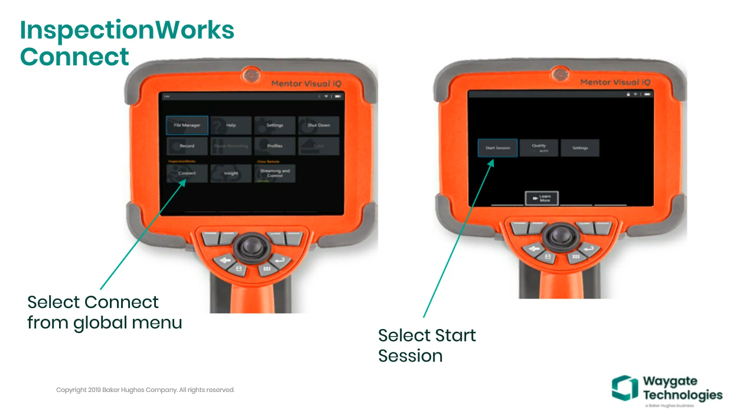Initiating an InspectionWorks Connect session from a Mentor Visual IQ is quite simple. Once the MVIQ is on a Wi-Fi network, and you would join it to a network just like you do your smartphone with a username and password, all you do is touch the on-screen Connect button, followed by touching the on-screen Start Session button. The MVIQ will now set up a communication session with the InspectionWorks Connect cloud host system, which will issue a set of session credentials for the upcoming live streaming event.

The Borescope inspector can call a remote expert on his cell phone and ask him to log into InspectionWorks.com and provide the credential information that's being shown on the video probe screen, or he can press the on-screen invite key located at the bottom of the screen on the Mentor Visual IQ, enter the email address, and the MVIQ can send an email directly to the remote expert's inbox asking him to log into a video streaming session with the session ID and password credentials included in that email.

Here's an example of what a remote expert would see on his PC screen, as well as what is being shown on the Mentor Visual IQ screen. Note that the remote expert and the inspector can have a text chat back and forth over the video streaming session.

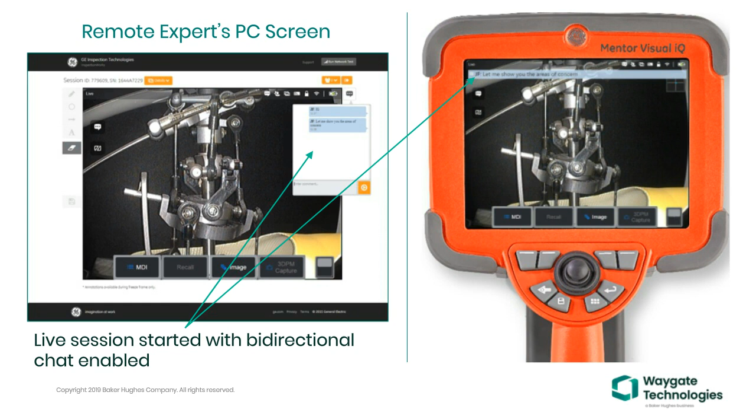When the inspector has gone into freeze frame mode on the video borescope, that is, the image is frozen, the remote expert can use the telestration tools to draw circles and arrows, as well as place on-screen text. All of this information will show up as overlay data on the screen of the video borescope in the field in the hands of the inspector.

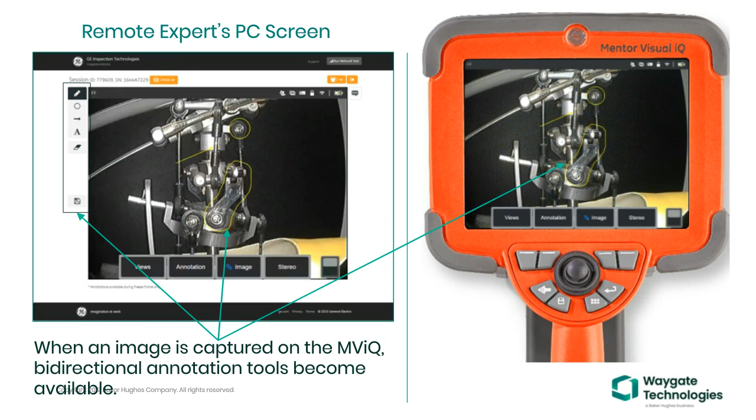I'm now going to demonstrate setting up an InspectionWorks Connect video streaming session. I do this by going to the main menu and touching Connect, and then Start Session. The Mentor now goes off and obtains a session ID and password from the InspectionWorks Connect host. I can now invite a remote expert, Tom Britton, to view this live inspection.

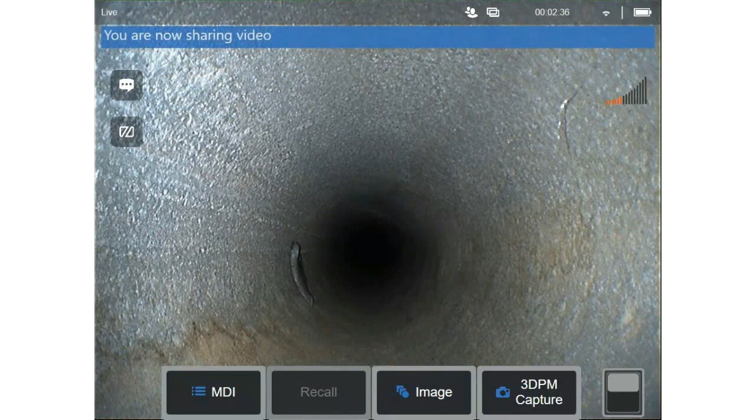I get a banner message on the top of my screen indicating it was sent. Once Tom joins the session, I get another banner message indicating that he has joined the session. And I go back to my live inspection. I'll get a confirmation message that he is actually seeing live video on his screen.

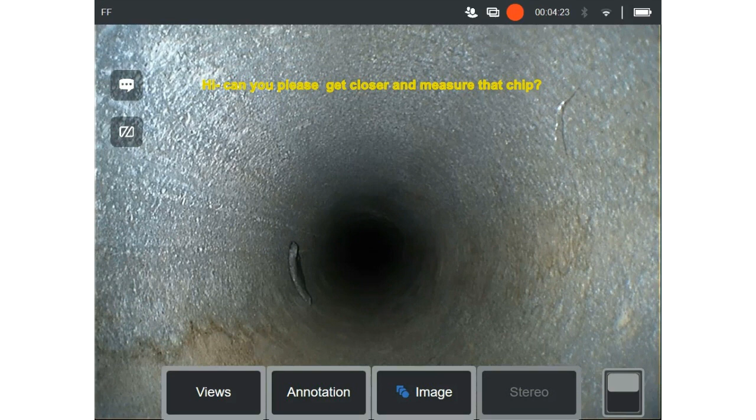I can now pause my video, send a chat message to Tom. He can respond back with a chat message to me. He's asking me to get closer and measure the chip that is visible down in the pipe. I'll move the video probe a little bit forward. I'll freeze the image again.

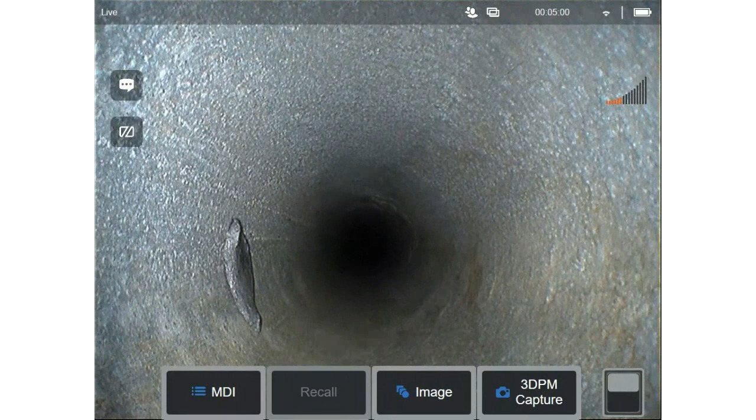Tom can continue to use his interactive telestration tools of arrows and circles and text messaging to continue an interactive inspection. I'll now discuss the iView Remote features of the Mentor Visual IQ. iView Remote is a local wireless connectivity feature of the Mentor Visual IQ that allows communication and control features with an iPhone and iPad iOS device without the need for any external adapters.

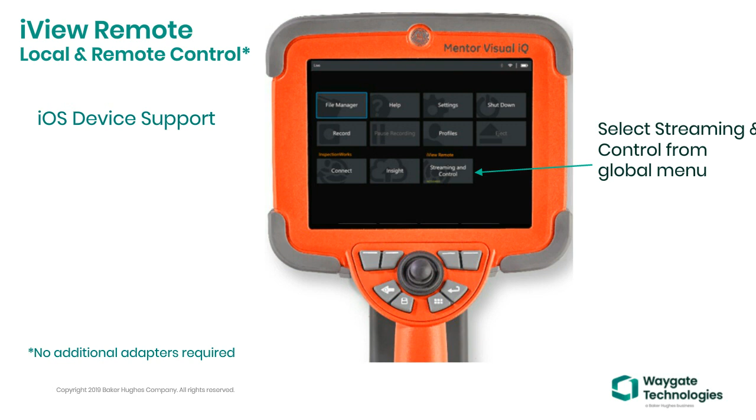The iView Remote Local Streaming feature provides a simple method of allowing a second inspector to see the borescope image without the need for cables and a large external monitor setup. The iView Remote feature allows local streaming to an iOS device, as well as data transfer back and forth between the iOS device and the video borescope, as well as full touchscreen remote control from the iPhone or the iPad's touchscreen.

All features that can be operated by the inspector with the borescope in his hand, including articulation, can be operated using the iPhone or iPad's touchscreen. The connection between the Mentor Visual IQ and the iOS device can be wired using an Apple Lightning cable, or the MVIQ can set itself up as a Wi-Fi hotspot, allowing the iPhone or iPad to communicate with the MVIQ.

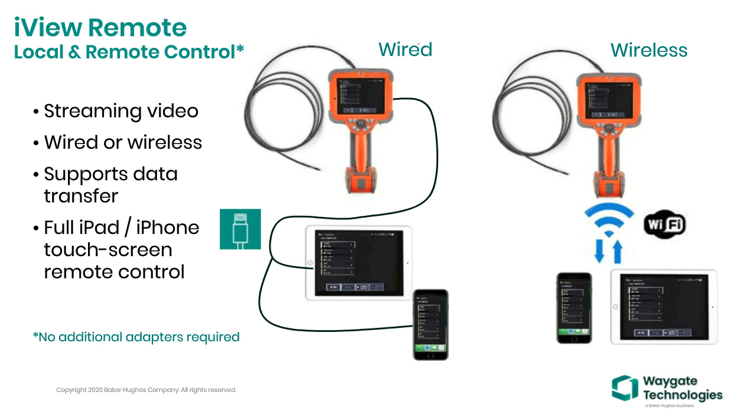I'd now like to introduce the Menu Directed Inspection, or MDI app, which may be run on a variety of Waygate Technologies video probes. This app allows for a highly efficient method of capturing inspection data, organizing that data, and if desired, creating a Microsoft Word or PDF inspection report directly from the video borescope.

At a high level, the MDI app can be thought of as a program that's loaded onto a video probe that contains a hierarchical tree structure of all the possible inspection points to be encountered during an inspection. This MDI enables consistently tagged inspection images from across a fleet of assets.

The context information is correlated at the point of image capture, thereby ensuring data integrity, so you know exactly what asset a given image was taken from and what location in the asset that particular image was located in.

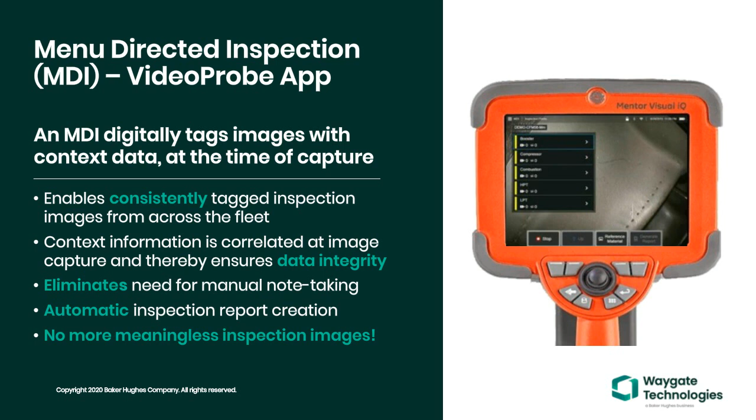It eliminates the need for manual note-taking. That means you don't have to correlate a little notepad on the side that gives a time and date stamp to a location associated with an image. It automatically creates an inspection report at the end of running the MDI. Again, no more meaningless inspection images—you know exactly the location of every image taken during an MDI inspection.

I spoke earlier about an MDI having a tree-like structure. An MDI is an inspection template created by the users of a Waygate Technologies video probe using the MDI Builder PC-based software development tool. We provide this tool and our users create the structure of their intended inspections.

So the MDI will allow you to develop an MDI inspection template that has 5 levels of inspection detail. You can generate reports with up to 1,600 total images, and there can be up to 2,500 total inspection points.

Each of the points associated with an image capture will have a set of XML database tags associated with that image. So if you are looking, for instance, at a CFM56 engine, and say you were in the high-pressure compressor, stage 2, looking at blade 31, the leading edge—all that information would be captured as metadata associated with that image, along with higher-level engine data such as the engine type, serial number, date, inspector's name, time of inspection, and any fault conditions such as burns, cracks, missing thermal barrier coating, or other comments associated with the inspection.

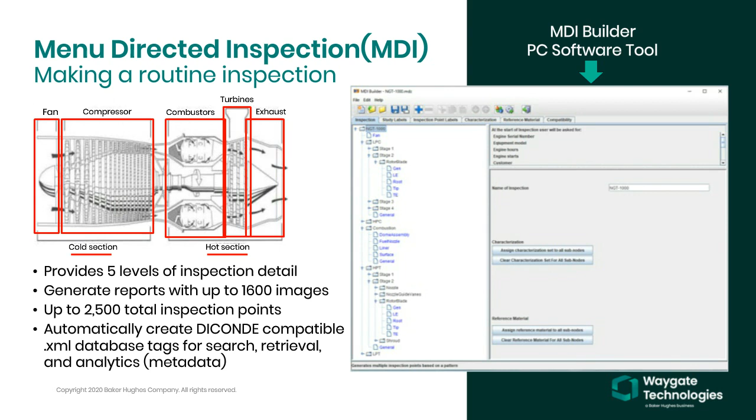Let's take a quick look at the data created during a traditional non-MDI inspection. This is what you would see: you may have some videos captured, with a time and date stamp, and images captured, also with a time and date stamp. There won't be any automatically generated report associated with that. So you'd have to have a little notepad on the side correlating any given time and date stamped image or video to the actual location in the asset where it was captured.

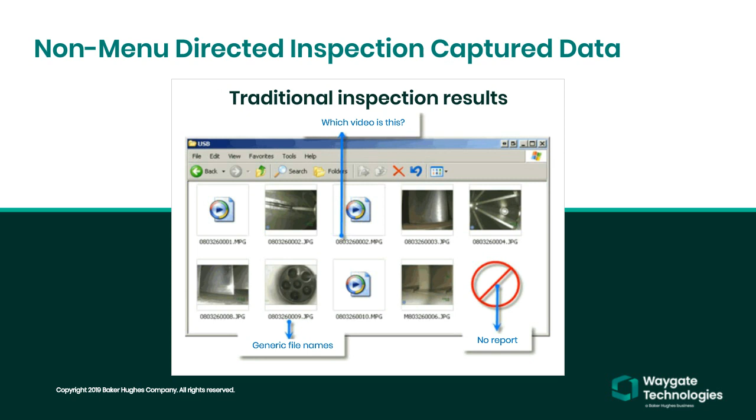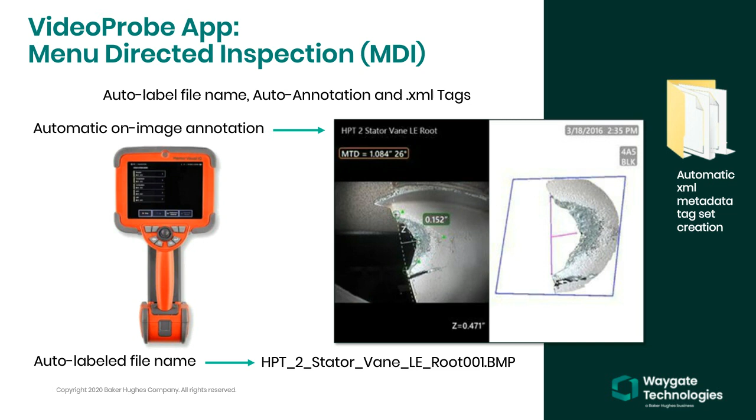It color codes these with green, yellow, and red. When the report is generated, you can select to create a report with all images or just flagged images.

Now I'm going to provide an overview of building an MDI and describe the types of features that are available in the MDI.

The MDI Builder tool has a series of tabs that allow you to enter specific MDI inspection details for your inspection. The first tab is where you build your tree structure, up to 5 levels. For any given MDI branch or end node, you can define a set of fault characteristics that the inspector will have available in a drop-down menu. Also, you can include reference images or documents in the MDI so that they are available for the inspector for reference at a given branch or end node inspection point.

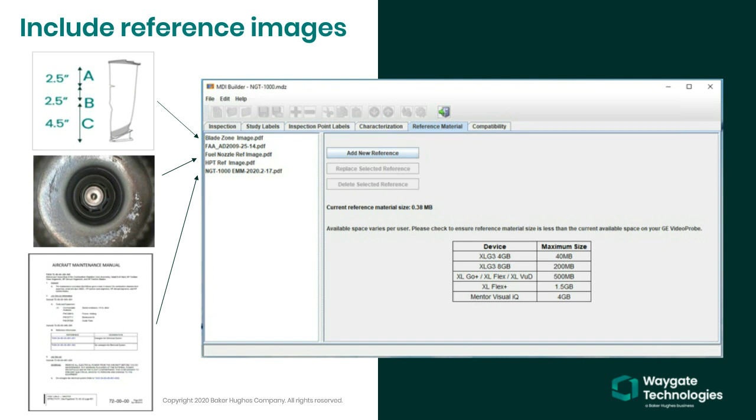Now I'll review the process of loading an MDI onto a Mentor Visual IQ video borescope.

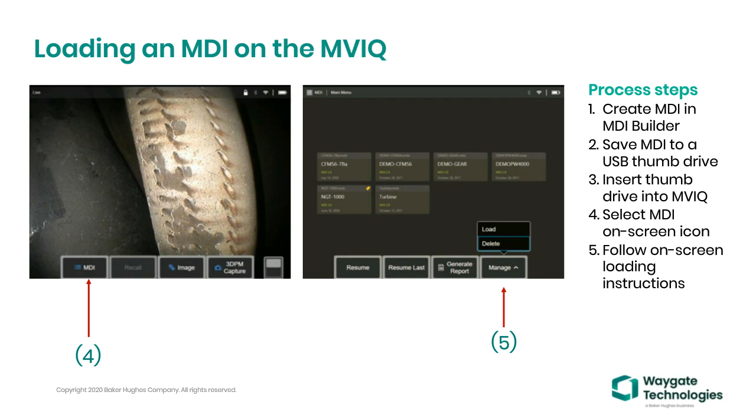I will now go through a summary of the process of running an MDI on a Mentor Visual IQ. This will be followed by a short video of an actual MDI inspection.

Once you've selected an MDI from the thumbnail list of installed MDIs, you'll be taken to the cover page data entry screen. This is where you enter all the data that you previously defined as being required or optional back in the MDI Builder. Once you have entered all of the required data, you will then transition to the top-level MDI inspection tree. Since the Mentor Visual IQ is a touchscreen-based product, you can navigate down the branches of the MDI to arrive at an end inspection point through a series of touches on the inspection tree itself.

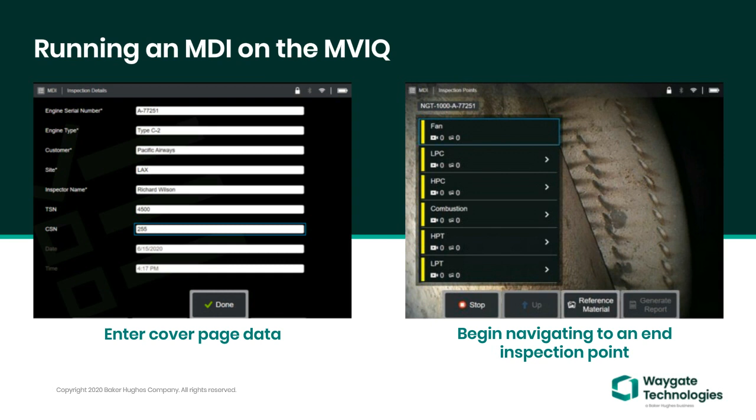Or you can add an audio clip, which will be saved as an MP3 file with the same root file name as the MDI image that's being saved here.

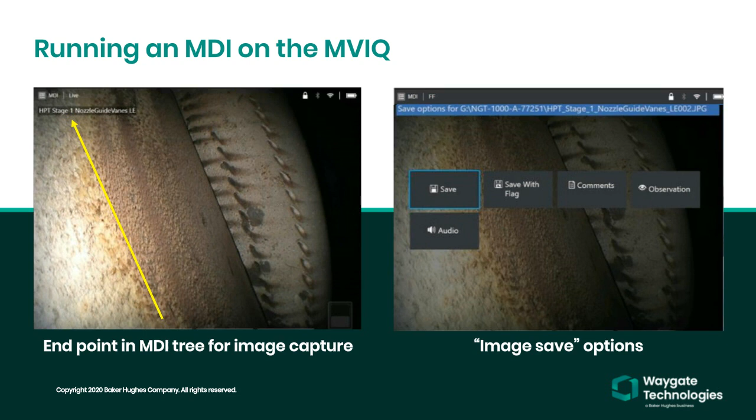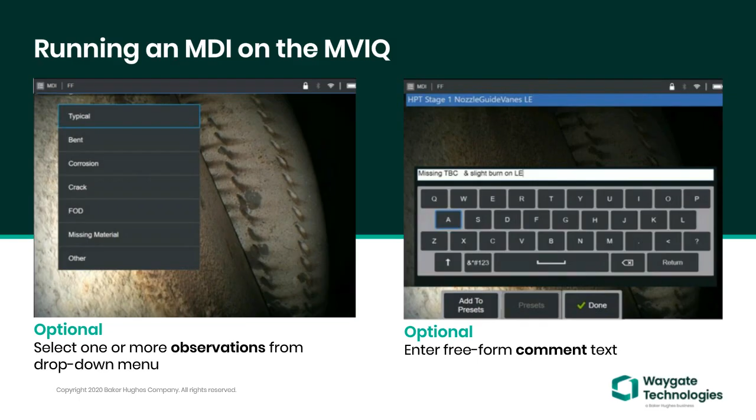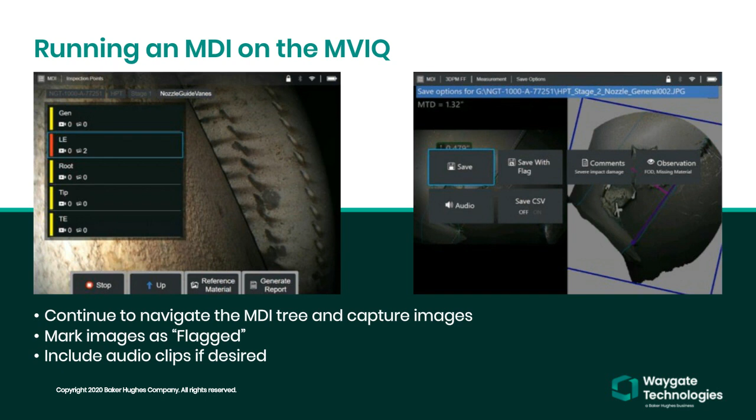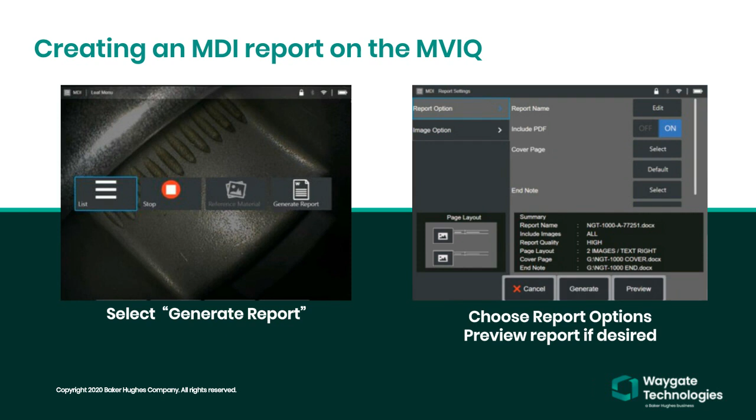Remember that an MDI does not need to be a full front-to-back inspection template. It actually could be designed to define a critical inspection point or two associated with some type of a service bulletin. The MDI potentially could contain reference images showing the orientation characteristics of the view of a component at an inspection point for which the author of the MDI would like to have captured.

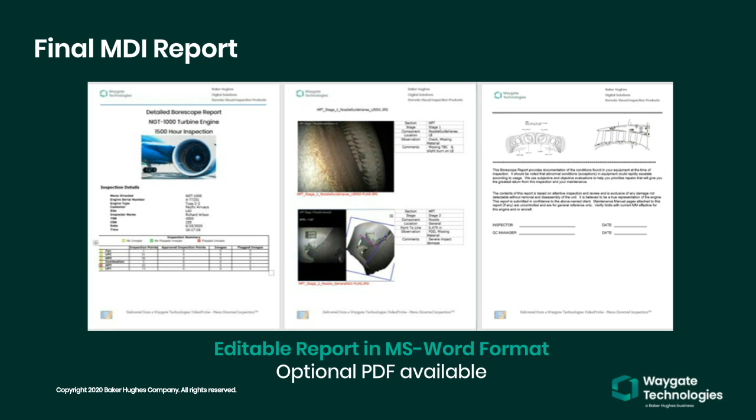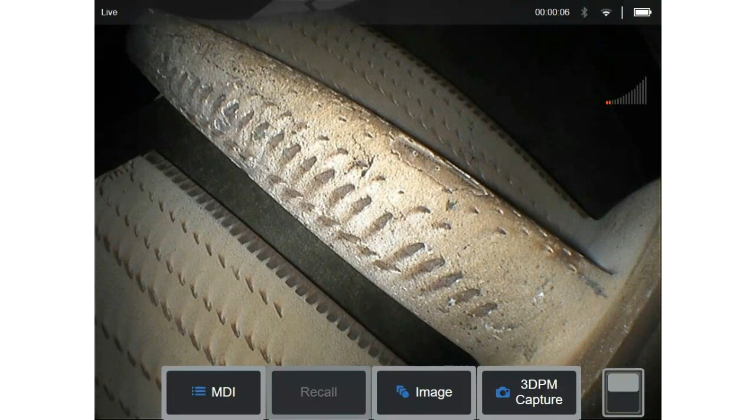I'm now going to demonstrate how to select and run an MDI on a Mentor Visual IQ. You begin by touching the MDI button. You will then be presented with a screen of available MDIs to choose from. I'll choose the NGT 1000. As soon as I make my selection, I'm presented with the cover page data entry sheet for the MDI. Note that some of this data must be entered before I can proceed with the MDI, and some is not required. Required information contains an asterisk.

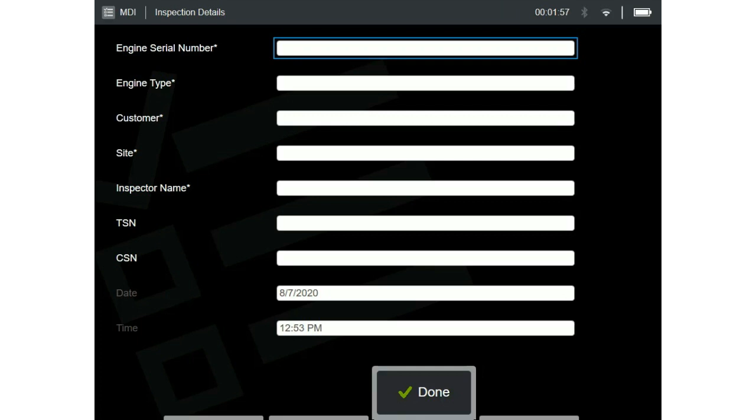I begin entering the requested data by touching the box, which brings up the on-screen keyboard. I type in the information and press Done. I do this for all the required fields. When I've completed all the required entry, I press Done. I'll now be presented with a screen which allows me to choose where I'm storing this MDI. In this case, it's being stored on my G drive.

Once I make that selection, I'm presented with the top-level MDI inspection tree. I can now begin my MDI inspection by touching one of the available main branches on the MDI screen. In this case, I'm going to choose the HPT. I'm going to choose Stage 1, and I'm going to choose Nozzle Guide Vanes. And I'm going to choose the leading edge.

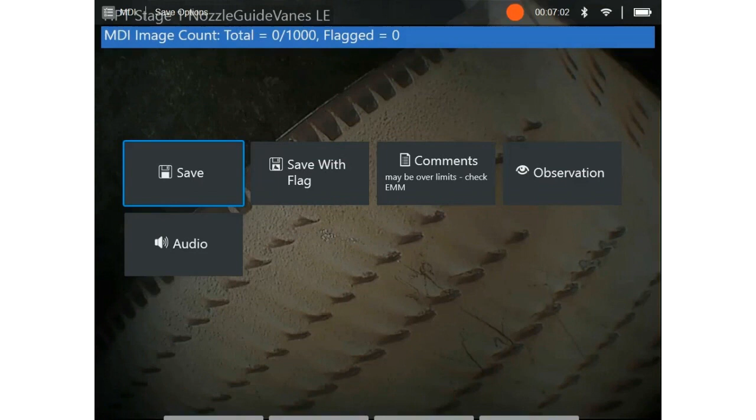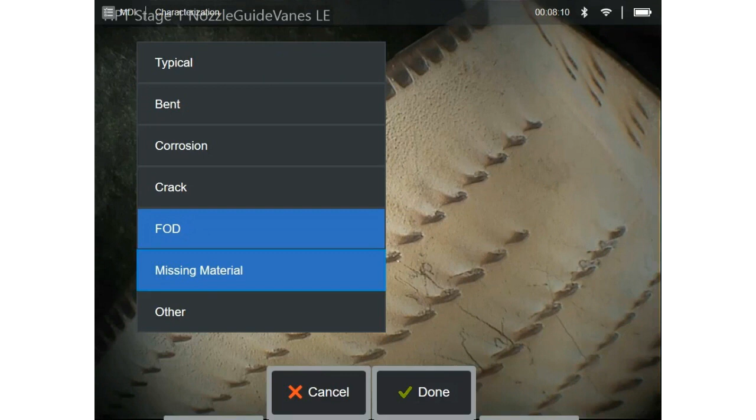Once I freeze the image, I'm given the option of saving it with a flag, adding comments, adding an observation, or including an audio clip. So before I save, I'm going to add some comments. I can add free-form text entry by touching the comment box. I can select from a drop-down list of observations by touching the observation box. I can select multiple characterizations, including an other category. Now that I've added my comments and observations, I'm going to save this image.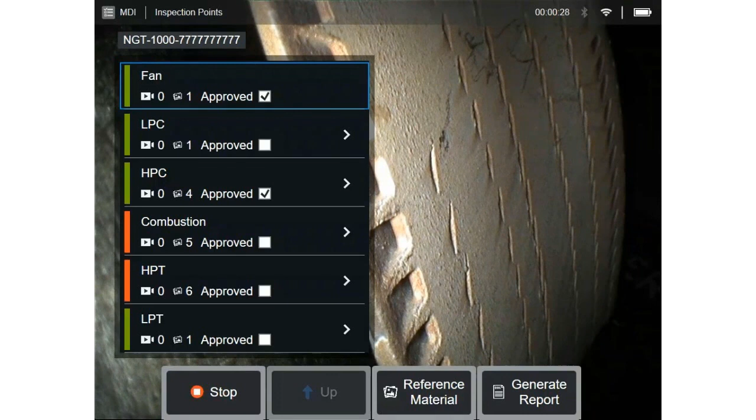Note that my comments and observations are shown directly in the command buttons on the screen. You can see the smart file name associated with this image in the header banner at the top of the screen. At any time during running the MDI, I can stop the MDI and resume it later on, or I can choose to generate a report. In order to generate a report, I press the on-screen Generate a Report key. The system will now show me a screen containing the output reporting format options.

I've already pre-selected to include a PDF as part of the output report. Now I'm going to select a custom cover page and a custom end page. When I touch Select, I can browse for these custom pages. They're located on my thumb drive. Once I have completed setting up the output report format, I can get a preview of this report by touching the Preview button.

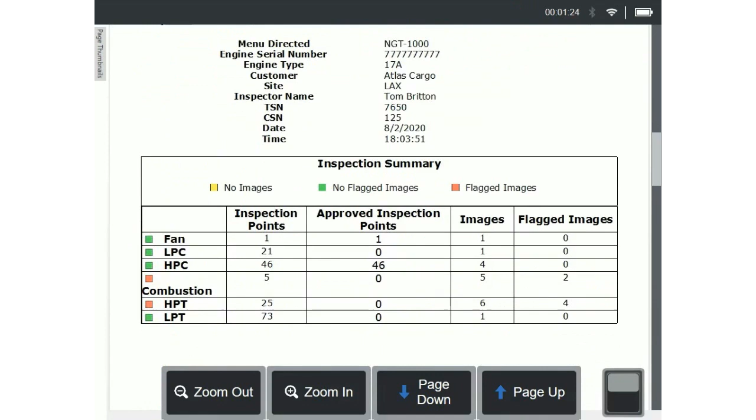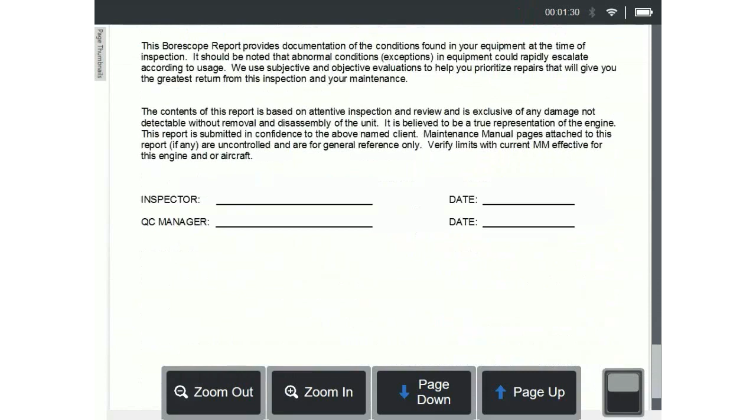I can review the cover page data which is entered at the beginning of the MDI, as well as the summary table that lists how many images were taken in each of the major branches and whether any of them were flagged. If I'm satisfied with the preview, I can touch the Generate button and create a full report. You can now exit the MDI and return to live video.

In the next few slides, I will discuss the various connectivity options available to support the import and export of data to and from the Mentor Visual IQ video borescope. As was previously mentioned when discussing live video streaming, the MVIQ contains a built-in Wi-Fi radio to allow it to send and receive data over a wired or wireless network connection. The MVIQ supports the features of being able to map a storage location on a network as a destination to store borescope data, or to allow another device on that network to share a folder in the MVIQ's memory structure. The MVIQ also supports a configuration where it appears as a mass storage device when attached to a PC, similar to the way you would attach an external USB hard drive to a PC.

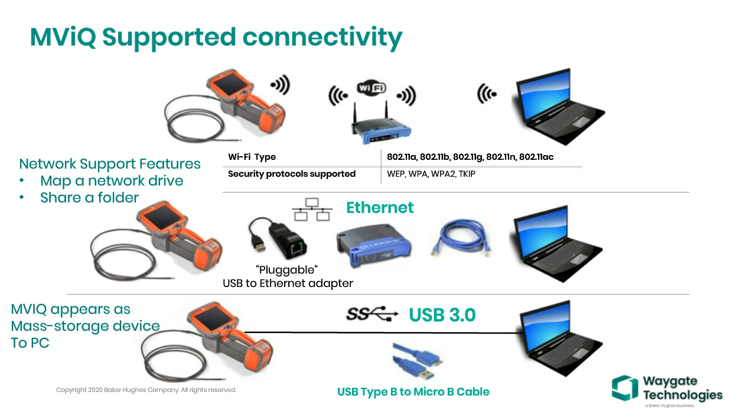The Mentor Visual IQ contains USB 3.0 interface ports, which allows it to support the attachment of external removable media devices, including encrypted flash drives and hard drives.

In cases where USB thumb drives or other USB media types are not allowed due to cybersecurity policies, an external USB-attached DVD read-write drive may be used to export and import data to and from the Mentor Visual IQ. Note that once the MVIQ writes data to the DVD drive, the media is finalized so that no malware files may be included on that DVD at a later date.

Following this slide, I'm going to ask a poll question about whether you have trouble getting data out of your video probe and onto another device.

The next few slides deal with a new connectivity feature of the MVIQ, which allows for a more efficient and accurate collection of inspection data when an engine turning tool is used during a Borescope inspection. This new connectivity feature of the MVIQ allows it to communicate with a Rhinestahl turning tool in order to obtain engine model number and type, engine stage number, and blade number information. The MVIQ can now communicate with a Rhinestahl RC2000NG turning tool system over a USB data link.

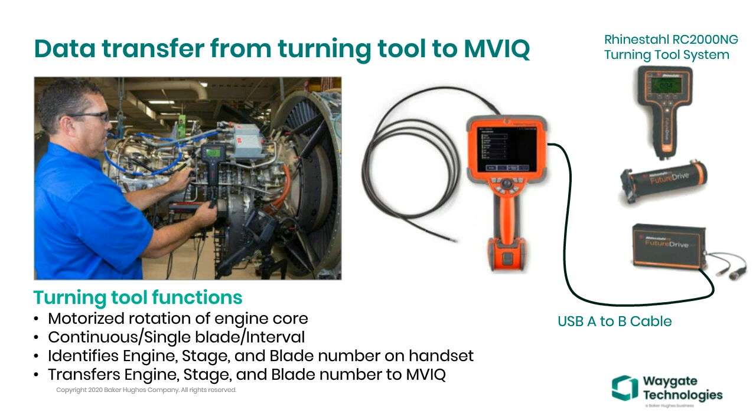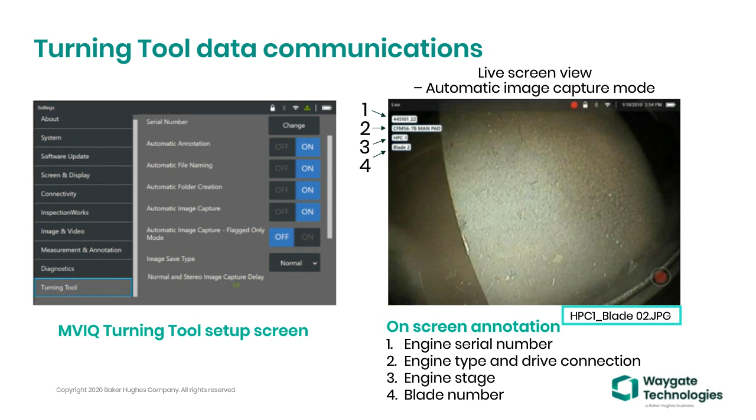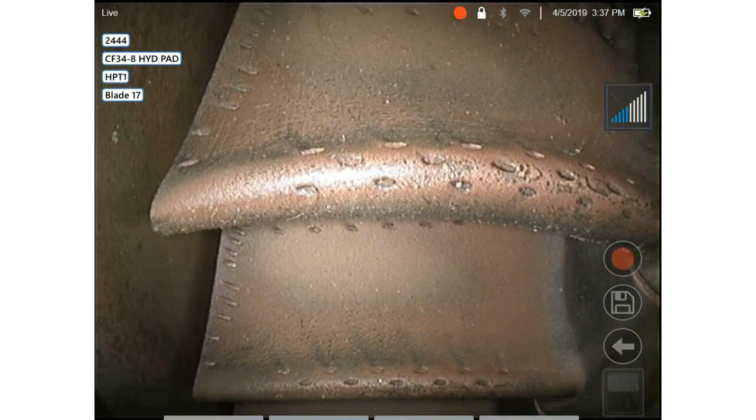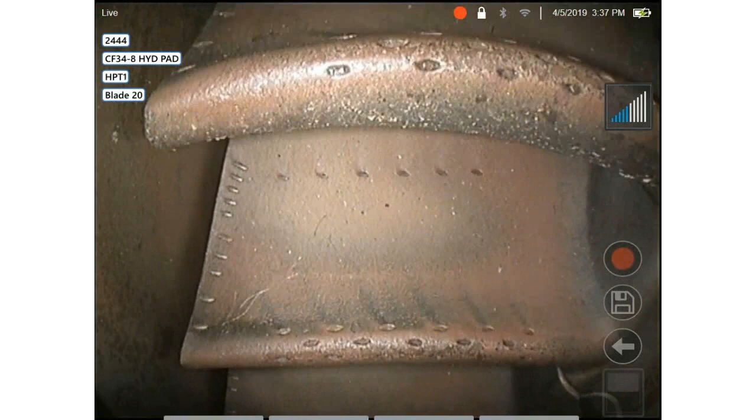This video has been captured by an MVIQ being used to inspect a CF34-8 engine. A Rhinestahl turning tool is also attached to the engine. There's a communication link between the MVIQ and the turning tool that allows the MVIQ to receive engine data from the turning tool. In this case, the turning tool is providing data which allows the MVIQ to create automatic on-screen annotation indicating the engine type, engine stage, and blade number. The MVIQ could have been set up to automatically capture an image of each blade as it passed by in front of the camera, but in this case it's set up for manual capture mode.

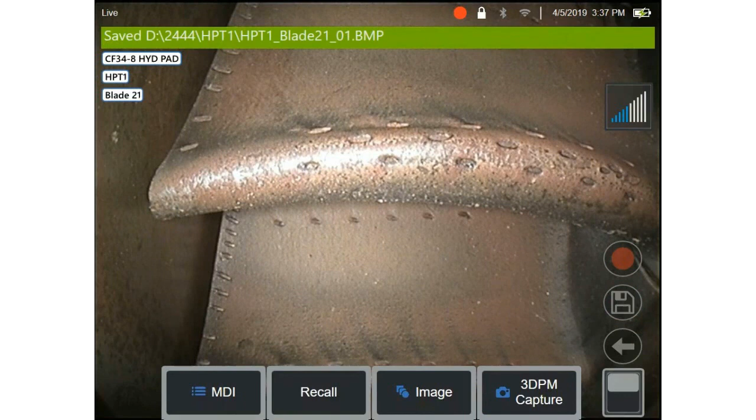You will notice that the inspector has chosen to manually save the image of blade number 21, and you can also see by the on-screen green banner that the MVIQ is saving this image with a smart file name of HPT1 blade 21 in the folder named after the engine serial number. The inspector can now continue with this inspection, saving any image along the way with a smart file name by simply pressing the Save button on the Mentor Visual IQ.

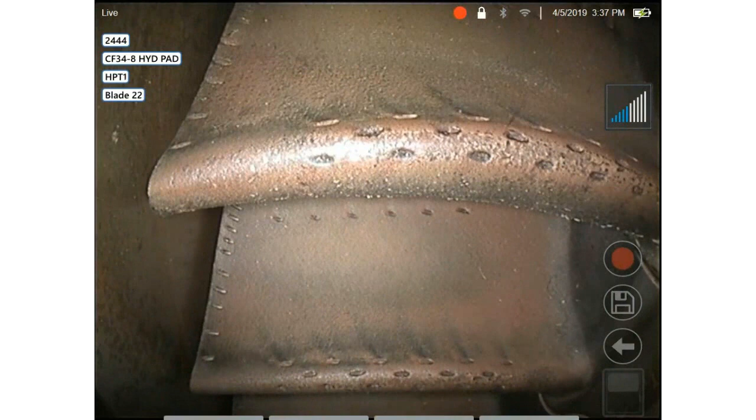For the traditional depth measurement, after you create a reference plane by creating 3 cursors, the MVIQ will automatically place the 4th cursor at a point which is either at a maximum height or maximum depth from the established plane you created with those 3 cursors, in the vicinity of those 3 cursors.

For a depth profile measurement, when you place 2 cursors on a plane surface, the MVIQ will automatically find the highest or lowest point along a path between those 2 cursors. An extension to the depth profile measurement is the area depth profile, where the MVIQ will automatically find the highest or lowest point above or below a defined area on a plane surface.

The final measurement to be discussed is a specialized measurement which is unique to Waygate Technologies. It is the ability to measure missing surface areas by projecting a reference plane from an adjacent surface in order to allow the placement of cursors in an empty space on that projected plane. This allows you, for example, to measure the missing area of a turbine blade tip which has been impacted by FOD.

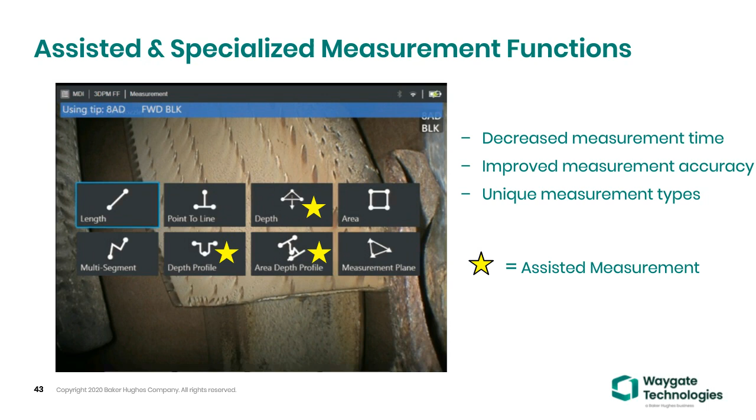I'm now going to present a series of assisted measurements where the MVIQ assists in performing the measurement by automatically finding the highest point or the lowest point for a depth type of measurement. I select measurement. From the menu of available measurements, I select depth. I place my first 2 cursors.

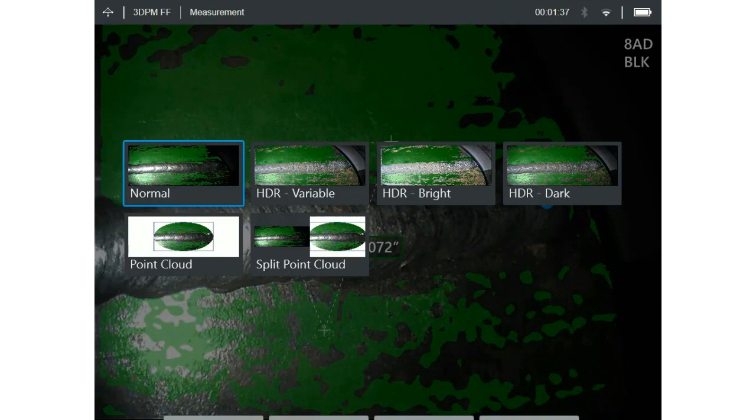As soon as I place the 3rd cursor, the 4th point, which is the highest point relative to that reference plane that was established by these first 3 cursors, is shown as being 72 thousandths above that reference plane. Let's go take a quick look at the point cloud so we can get a better understanding of the overall geometry of the area being inspected and verify the accuracy of our cursor placement on the indication.

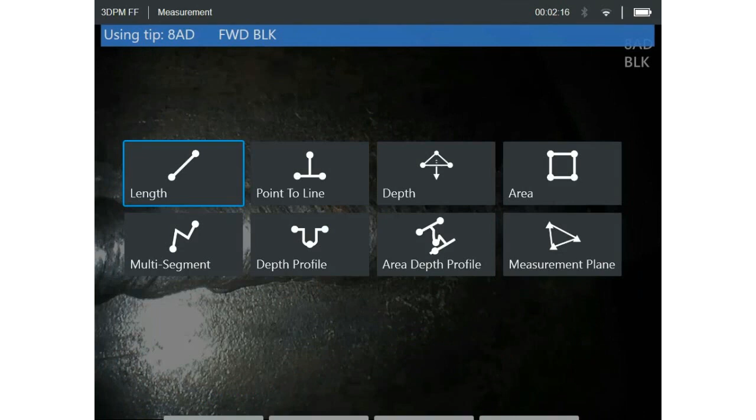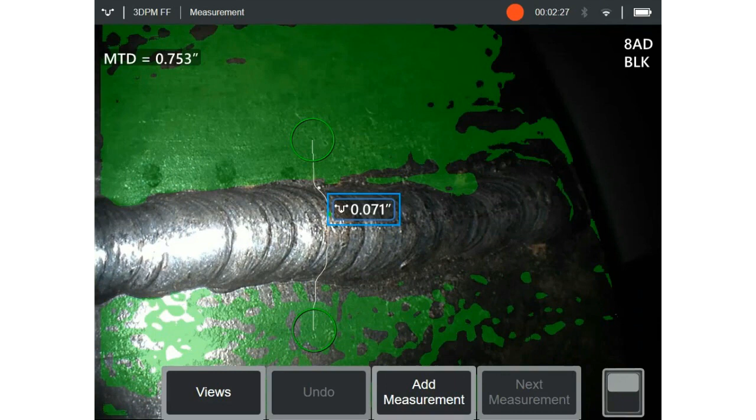I'm now going to use another assisted measurement type, the depth profile, to find the highest point between 2 cursors which are placed on a plane surface. Again, select measurement. This time select depth profile. The first cursor appears. I put it on one side of the weld. As soon as I touch to place the cursor on the other side of the weld, it automatically finds me the highest point between those 2 cursors. Again, let's go take a quick look at the point cloud.

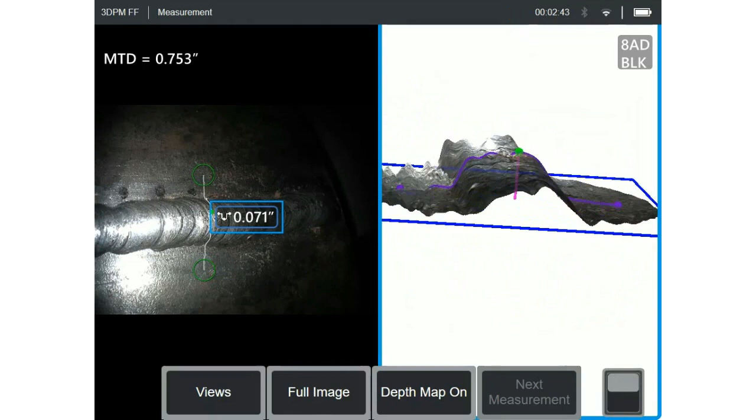The depth profile has an additional view available, which is the depth profile view, which shows the actual elevation point that you can modify. You can use a joystick or your finger to move the final cursor on the reference image profile view.

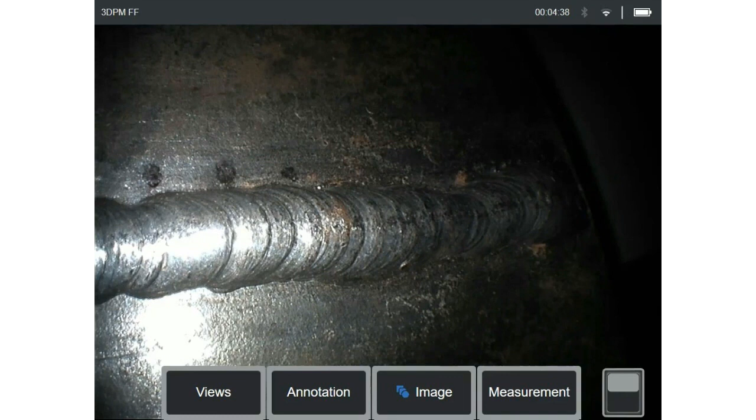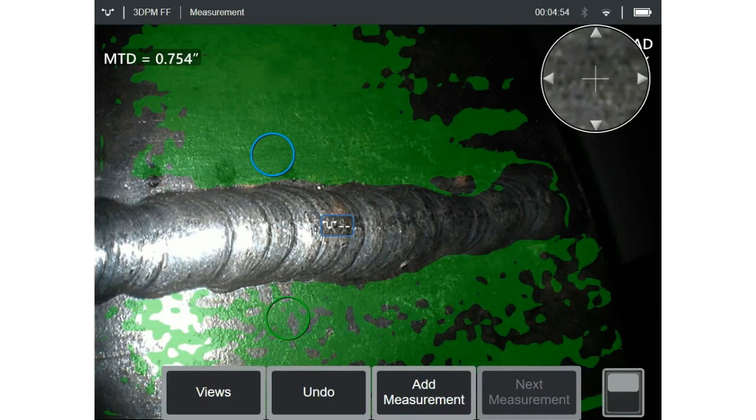The final measurement type I'm going to demonstrate on this weld image is the area depth profile. Remember, when I demonstrated the depth profile, I put down 2 cursors and the system found the highest point between those 2 cursors. If I'm interested to find the highest point of this entire weld, I'd have to move my cursors one by one along the weld to be able to find the highest point. Recognizing this requirement, we developed an area depth profile measurement which will allow you to span the entire weld surface.

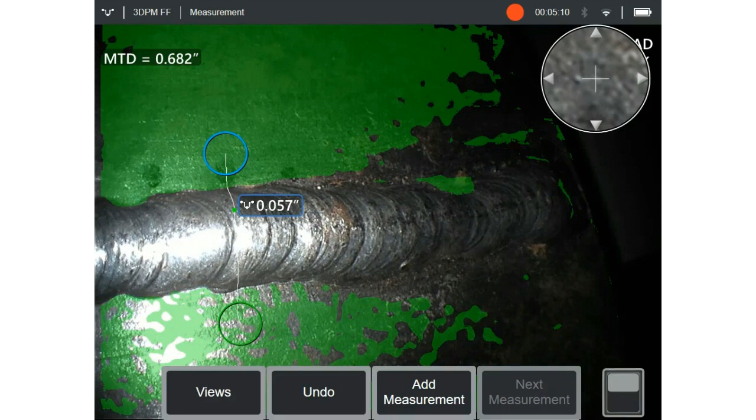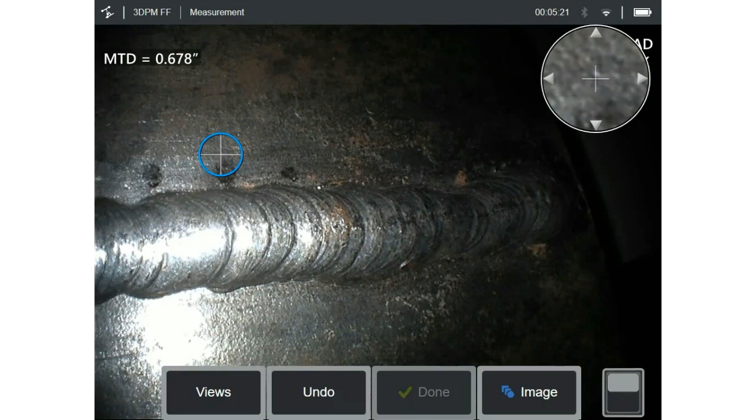So let me go and delete that particular measurement. Now I'll go add the area depth profile measurement. So I put down 2 cursors at first, I put my 3rd cursor down there, and what it does is conduct a series of depth profile measurements, and it finds the highest point as being 71 thousandths between the parallel lines which are established on either side of the weld.

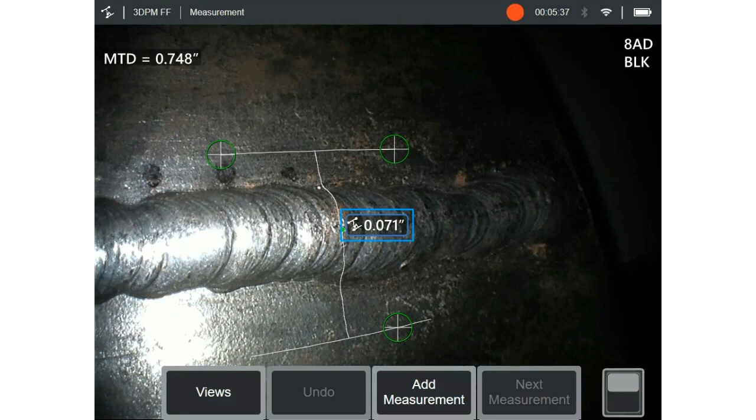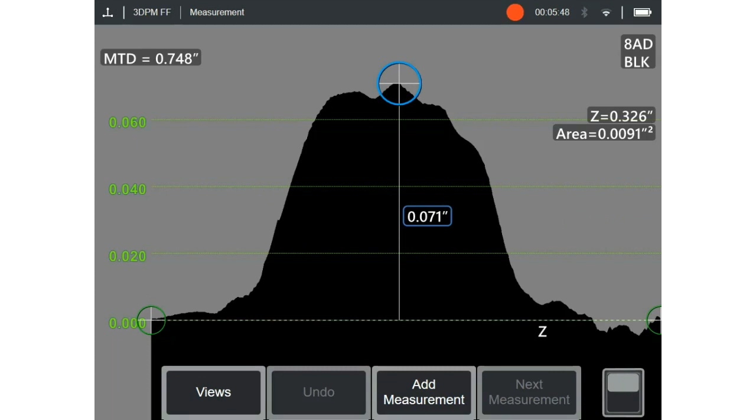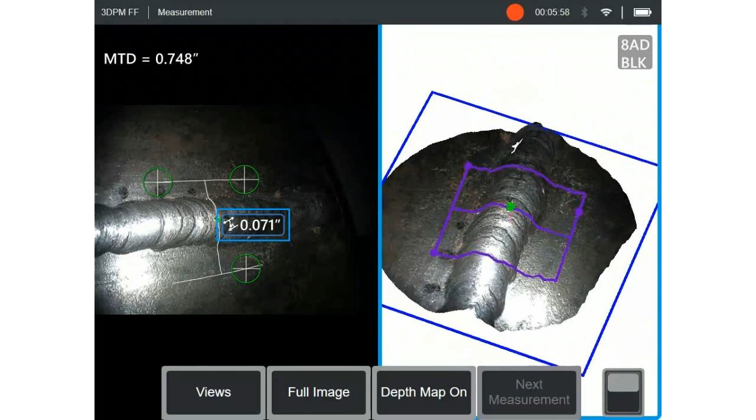Again, I can go into my depth profile view and find the fact that the highest point is 71 thousandths. I can also go and view the point cloud as I did before, and this time you can actually see the area which has been scanned with a series of depth profiles to find the highest elevation point.

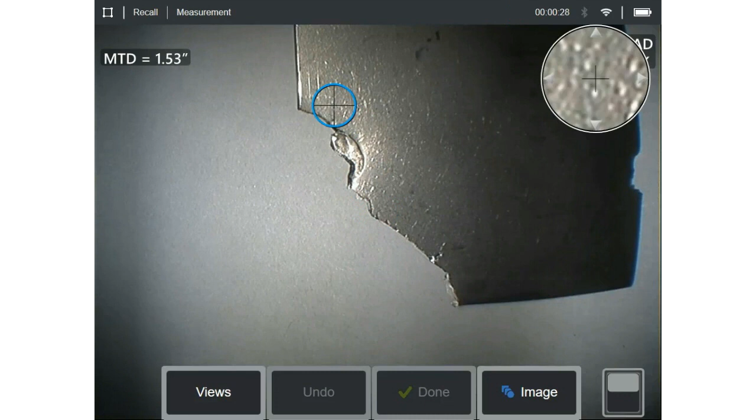First, I select the measurement feature. I select the area function. The first cursor appears. I put it at the beginning of the defect. I put the second cursor somewhere out in space where I believe the tip used to be. Put the 3rd cursor here.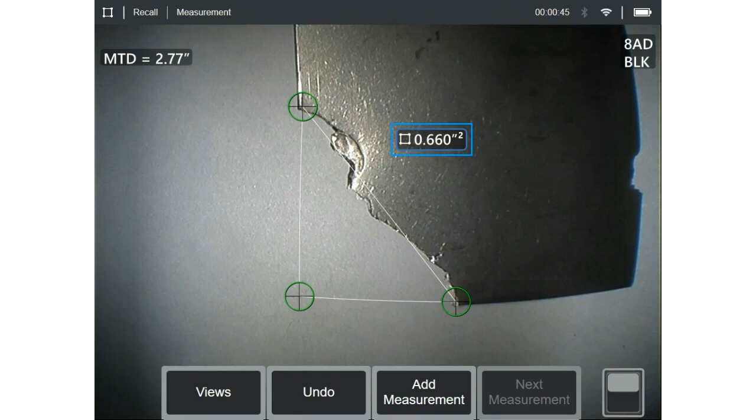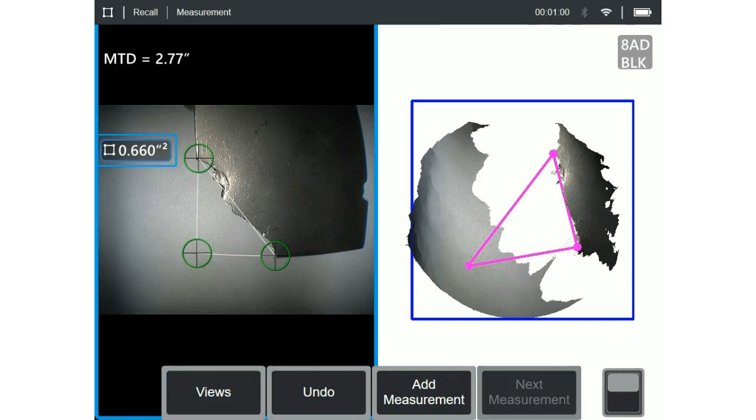Hit done. And the system will calculate that this area right here is 660 thousandths of a square inch. Let's now go take a look at what I'm actually measuring by looking at the point cloud. And as you can see here, this is the area on the surface of the blade. Here is the surface of the blade as well. This blue box is the plane surface around this area that I've measured here.

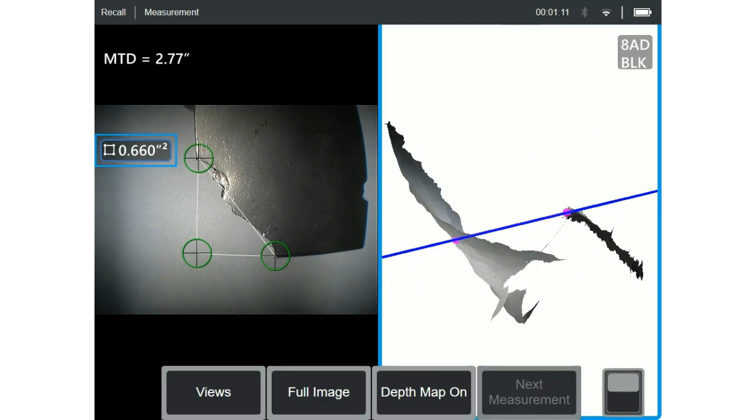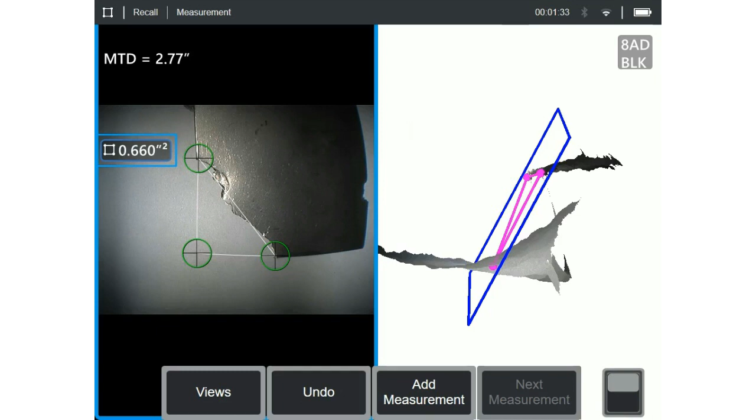Let's rotate the point cloud and understand what am I really measuring. Well, I'm measuring this point that is somewhere way down, not on the same plane as this blade surface. You can see the blade surface is right here, and I'm measuring on a plane that is departing from this blade surface. So I could correct this by going ahead and adding what we call the measurement plane.

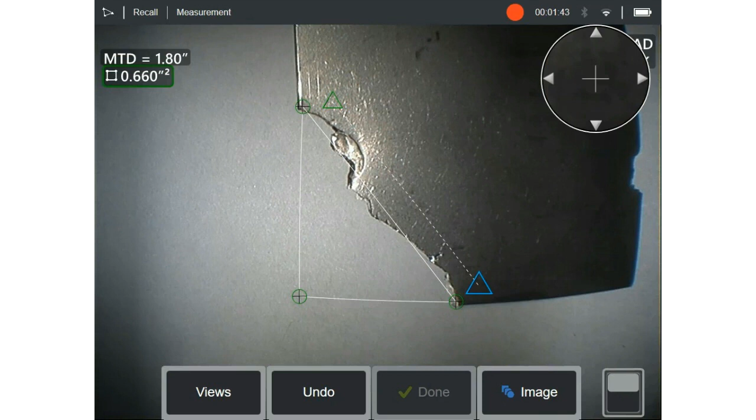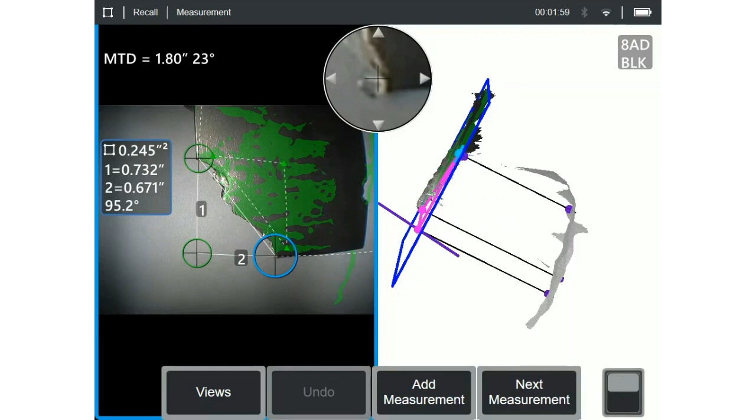And now if I add first cursor, second cursor, third cursor, three cursors create a plane. I've now forced this measurement to be on this same plane as the blade surface. Let's go back and take a quick look at the point cloud, and you can see that measurement is directly on the plane associated with the blade.

The alternate method of performing this measurement would have been to perform two separate point-to-line measurements in order to establish the lengths of these two segments, segment number 1 and segment number 2, and then do a point-to-point measurement for segment number 3, and then on a piece of paper calculate the actual missing area. As you can see here, this was all done automatically for you, and each segment was listed for its segment length here, and the total area was calculated automatically.

Next, I'll be discussing the PC Software Inspection Manager program, software that allows remeasurement of measurement images captured by Waygate Technologies video borescopes. This screen shows the Inspection Manager version 3.0 user interface. Inspection Manager is PC-based remeasurement software, fully compatible with the Mentor Visual IQ 3D measurement system, as well as traditional stereo on the legacy Waygate Technologies XL Go, Vu, and Flex products.

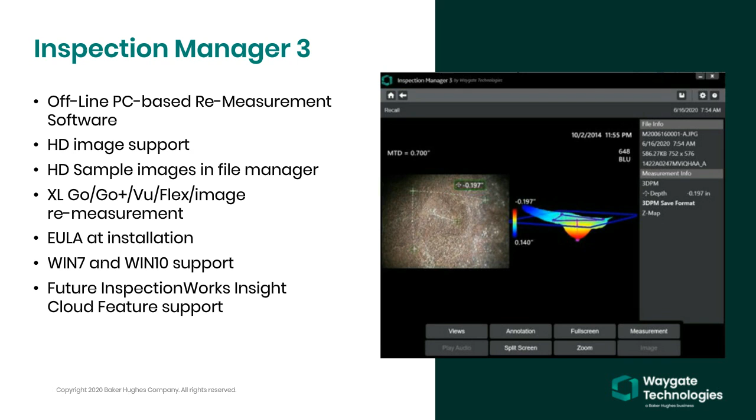I'll now discuss InspectionWorks, a key part of Waygate Technologies' digital inspection solutions product offerings. Let me start by describing what InspectionWorks is and then how it achieves its objectives. InspectionWorks is a secured cloud platform that helps streamline the inspection process from live data acquisition and sharing to disposition. And it achieves this by allowing connected NDT devices to collaborate with remote experts, to use workflow-driven inspection applications, and to centralize data storage for analysis and reporting. You remember earlier I talked about InspectionWorks Connect. That is just another feature of the InspectionWorks platform that supports the live streaming feature.

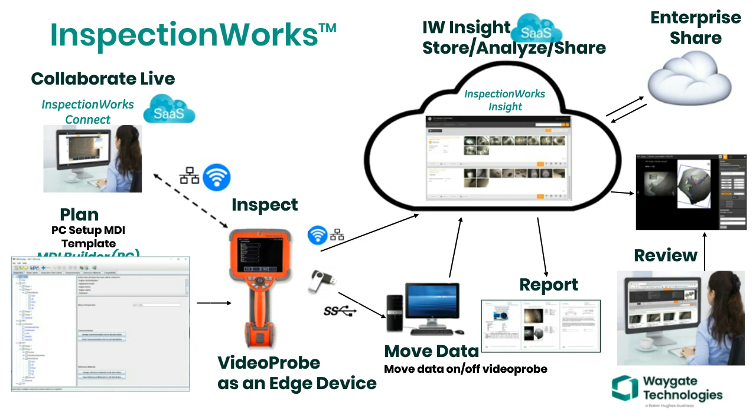Let me provide a high-level definition of the InspectionWorks Insight environment. It's a secured cloud storage environment that can ingest RVI inspection data directly from a video borescope or from a PC. The structure follows that of a menu-directed inspection. It has meta tag data collected directly during the inspection, making it easy to be analyzed, reported, and shared with other users or software, such as asset management software.

Here's a graphic of how information can flow between inspection devices, such as the Mentor Visual IQ, the InspectionWorks Insight Cloud, and a customer's enterprise network environment. For some customers, the InspectionWorks Insight Cloud provides a complete, secure archive storage, management, and reporting platform. Other customers may require that the RVI or NDT data be delivered to their enterprise network environment, where they will conduct proprietary analytics and create asset health-based operating processes.

As it is often difficult to get a device such as the Mentor Visual IQ directly onto a customer's enterprise network, the InspectionWorks Insight Cloud provides a secure, efficient method to allow inspection data to flow through the InspectionWorks Insight Cloud to a customer's enterprise network environment. In this graphic, you can see that the remote users can log in and access the data in the InspectionWorks Insight Cloud services. It's a secure environment using a single sign-on authentication process.

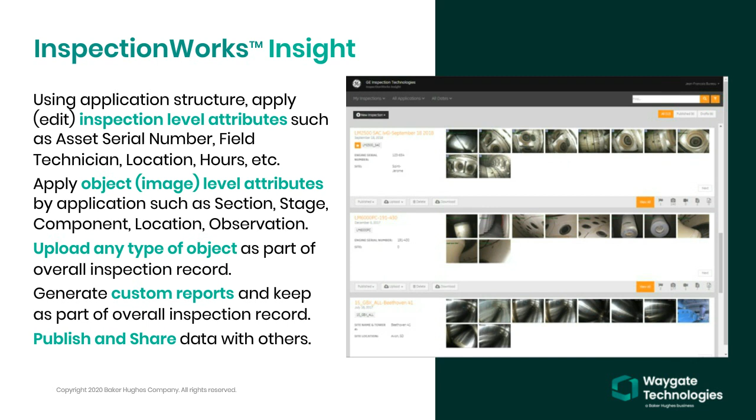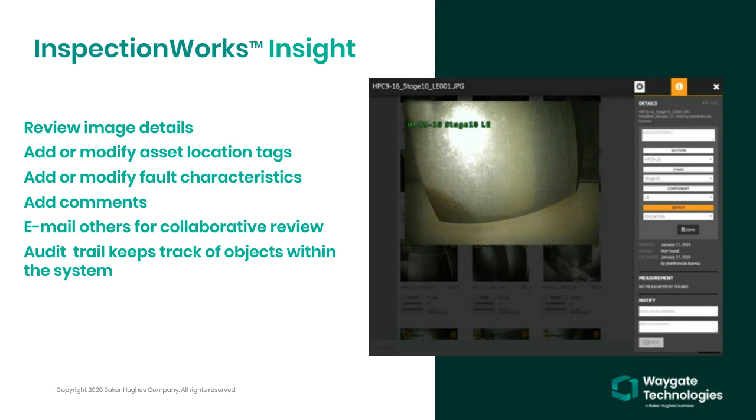InspectionWorks Insight is capable of creating much richer reports compared to an MDI report created on a video probe. It has the ability to embed customer-specific images and tables into the report. Just like an MDI-created report, InspectionWorks Insight provides both Microsoft Word and PDF reporting formats.